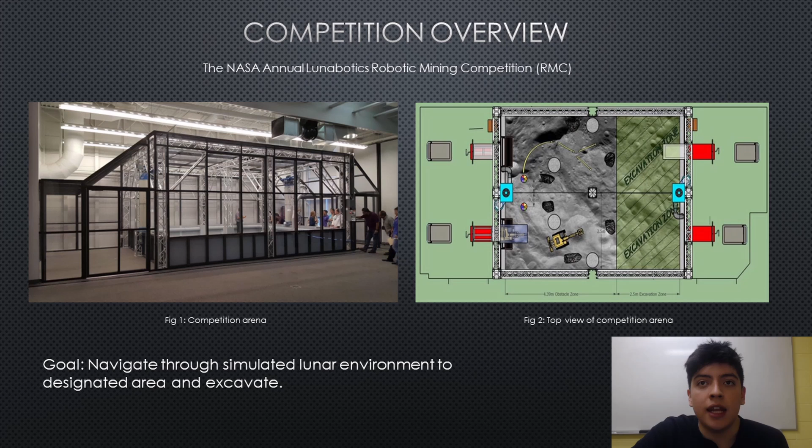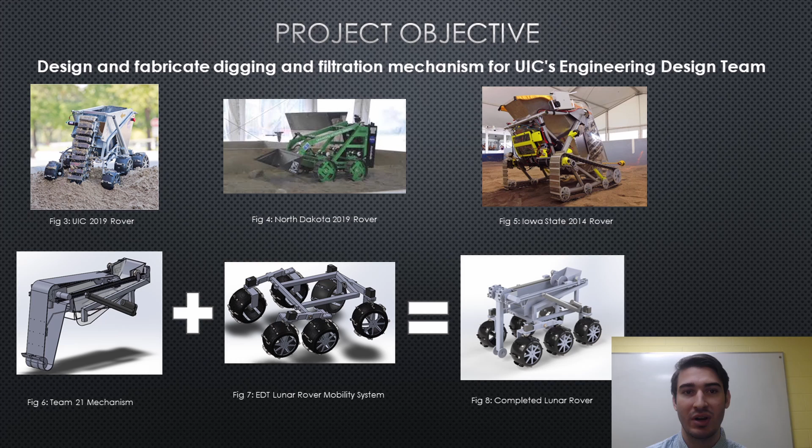The goal is to design and fabricate a digging and filtration mechanism and attach it to UIC's engineering design team's mobility system. The team will earn 1,000 points if the rover passes safety and communications inspections, and the rover fits within the starting dimensions shown in the figure. The team will also earn 10 points per kilogram of gravel mined in excess of 1 kilogram.

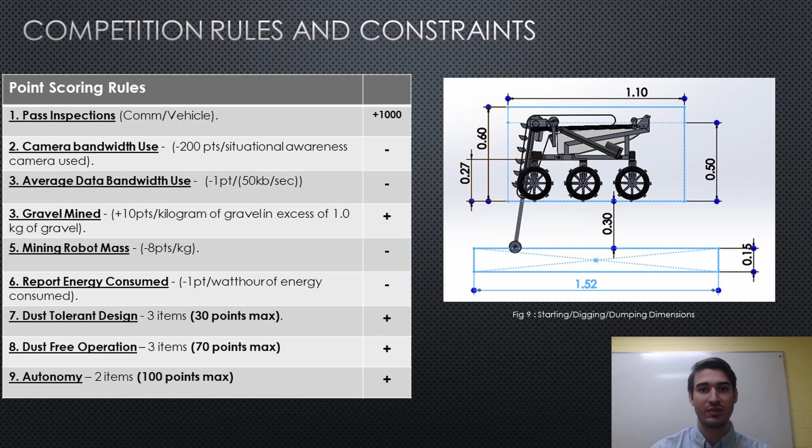To do this, our mechanism must dig through 30 centimeters of regolith to reach the gravel layer, and must dump it into a collection bin at a height of 50 centimeters. The team loses 8 points per kilogram of mass for the rover. Dust-tolerant design and dust-free operation will earn points according to the judge's discretion. Automation of the digging and dumping process earns 50 points each. The team will also lose points for camera and data bandwidth used along with energy consumed.

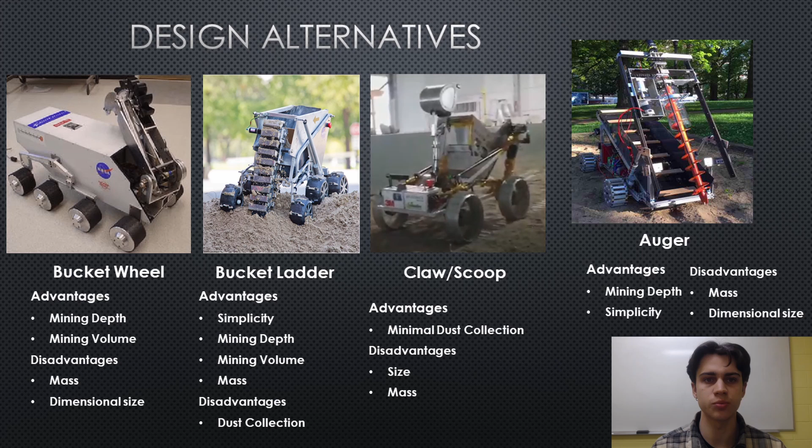After reviewing videos of various digging mechanisms from the previous NASA competitions and studying written works on the topic, the team narrowed down the design for the digging mechanism to be based off of one of the 4 following systems. These 4 systems consisted of an auger, a bucket ladder, a bucket wheel, and a scooping arm. The main reasons why these 4 stood out from other digging mechanisms were that all 4 have had some form of proven success in this competition previously, while also appearing to be the most feasible to manufacture with the tools available.

The team used a design matrix to assist in selecting the digging mechanism type that would be the most optimal for this specific application. 7 key aspects were considered for each design type, and scores were given at the discretion of the team members. As is displayed in Table 1, the selection criteria related to the mechanism's overall mass and mining capability were ranked at the highest weight of importance. This is due to them both being directly related to how Chicago EDT can earn competition points.

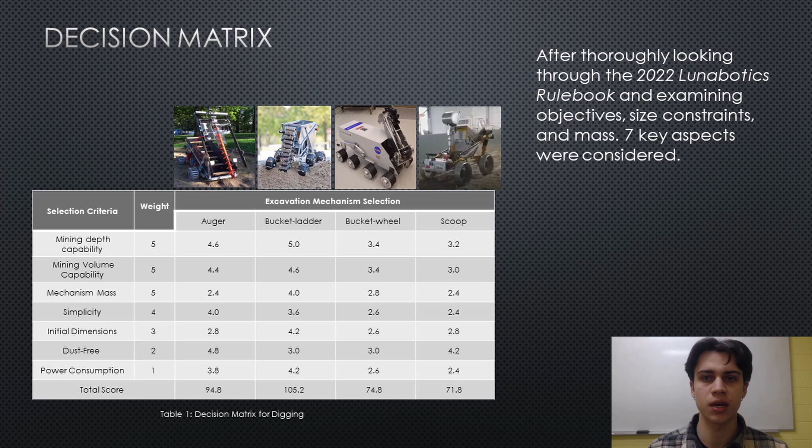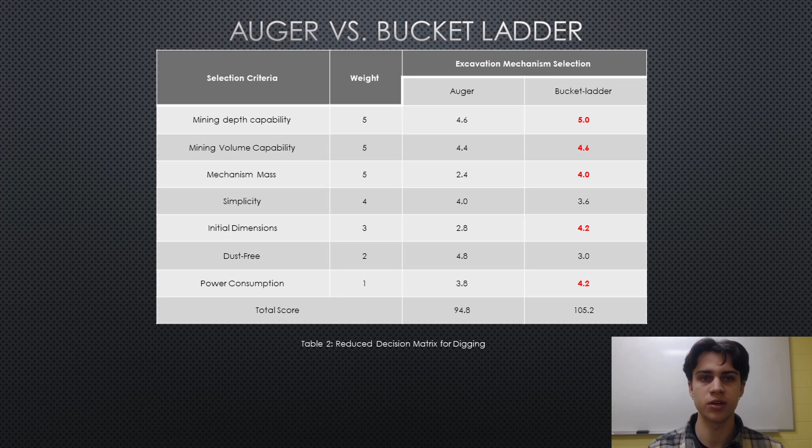Other criteria such as simplicity and initial dimensioning were also taken into consideration in order to make the design and fabrication more feasible. Out of the 4 designs, the 2 most prominent options were the auger system and the bucket ladder system, with the bucket ladder scoring the highest overall. Some key factors that made the bucket ladder stand out were that it scored the highest on all 3 major design criteria, as well as scoring the highest in the initial dimensioning section. Additionally, the team's research uncovered that in previous years, bucket ladder systems have proven to be the most effective in their competition and have outperformed their auger mechanism competitors.

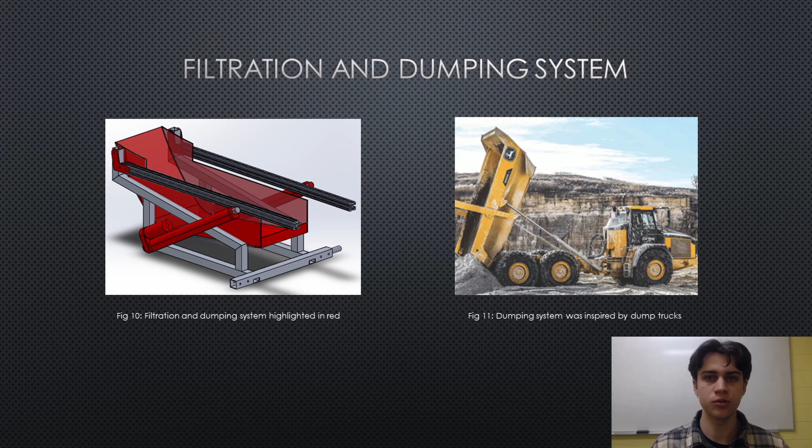The team's digging mechanism will also have an additional filtration and dumping system for unloading the collected mining sample. This simple system consists of a mesh collection bucket and 2 linear actuators that pivot on a rotational point. This allows for the team's mechanism to do all 3 actions of digging up a sample, filtering the sample, and then finally unloading the sample into a collection bin.

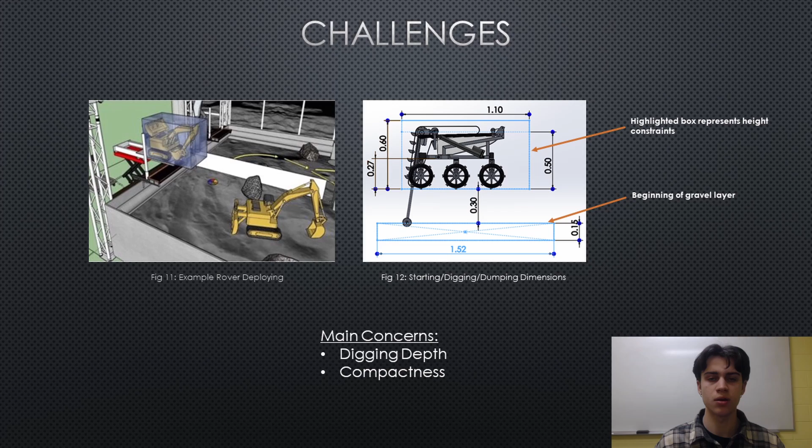The 2 biggest challenges for the team when designing the bucket ladder mechanism were the digging depth requirement and the size constraints. To overcome the digging depth issue, the team decided to design a bucket ladder that extends and retracts using a linear actuator and constant force springs. The size constraint concern was addressed by designing a bucket ladder with a bend that allows for the shape of the bucket ladder to be adjustable.

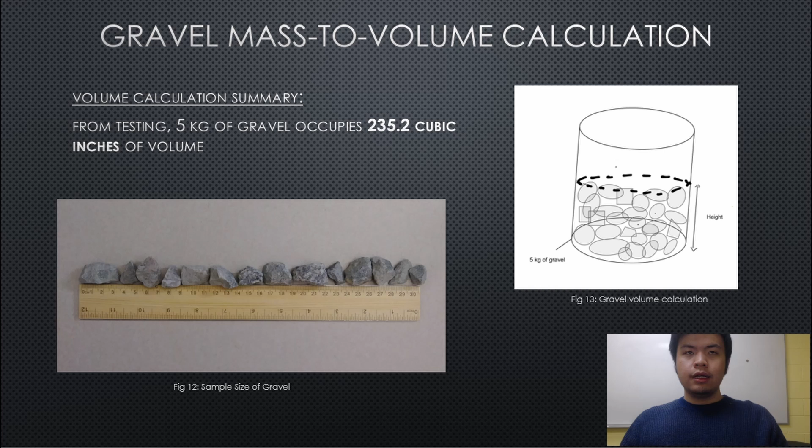For our preliminary calculation, we need a solid idea of how much space the gravel collected is going to occupy. Since the goal is to collect 5 kilograms of gravel, the following calculation is telling us that our collection bucket needs to have at least 235.2 cubic inches to accumulate that amount.

An important aspect the team focused on is getting a filtering method that is able to separate regolith. To achieve this, we are testing different metal meshes with different hole sizes, as well as 3D printed mesh. We were able to filter the gravel well with mesh sizes that range from 1/4 to 5/8 of an inch. Additionally, with an angle of elevation ranging from 9 to 15 degrees on a smooth metal surface, we found that this gives us the optimal gravel sliding.

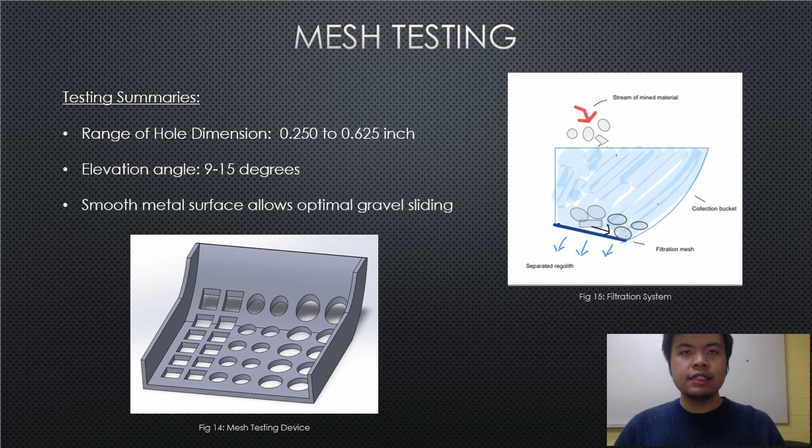Since our dumping sieve is placed at a higher position, it is important that the team devise a plan to dump the content of the collection bucket into the sieve. We decided to use 2 linear actuators mounted into the frame, such that when they extend, they will lift the collection bucket to an upright dumping position, as shown in the picture. We calculated the weights and position for these different lengths of linear actuators, and we found that a couple of 12-inch 150 pound force linear actuators are going to give us the lift that we need.

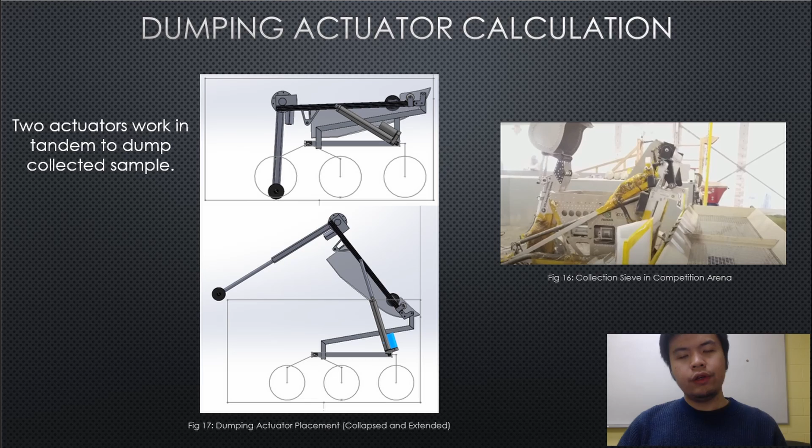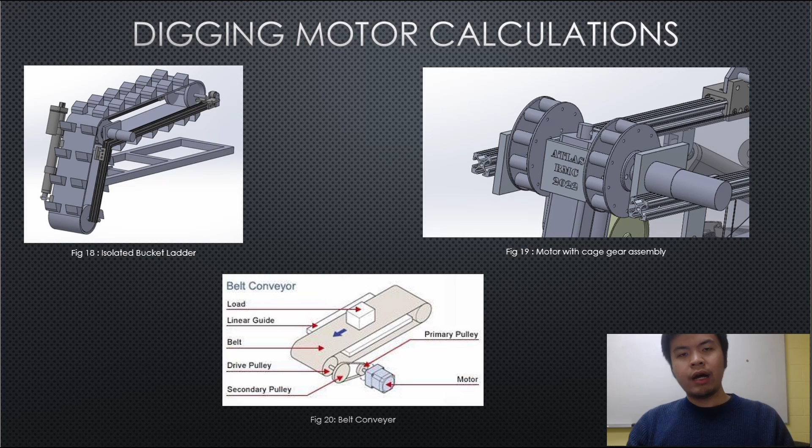Moving forward to our digging mechanism, the first thing we did is find out the amount of torque needed to operate our digging mechanism. Our team did a calculation based on the weight of the component of the digging bucket, the distances of the tensioner wheel, and the diameter of our gear to find the minimum amount of torque needed to operate the bucket ladder.

In the digging mechanism, the constant force springs are used to retract the belt of the bucket ladder once it is finished digging. To select the proper constant force spring, the load, such as the mass of the belt and gravel, on the spring, and the extension length required were considered.

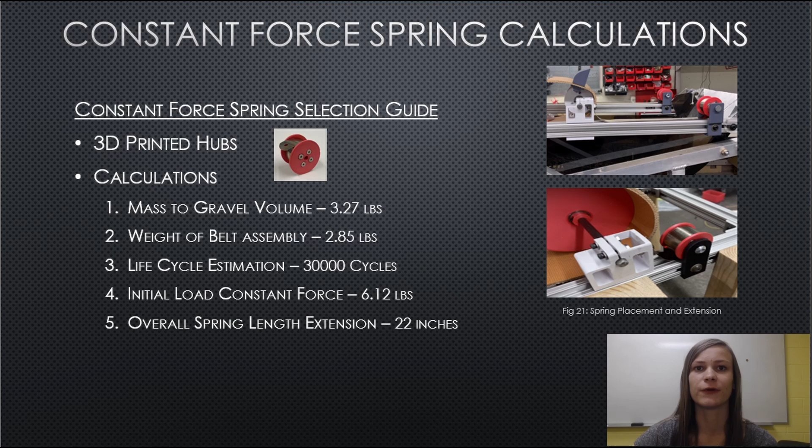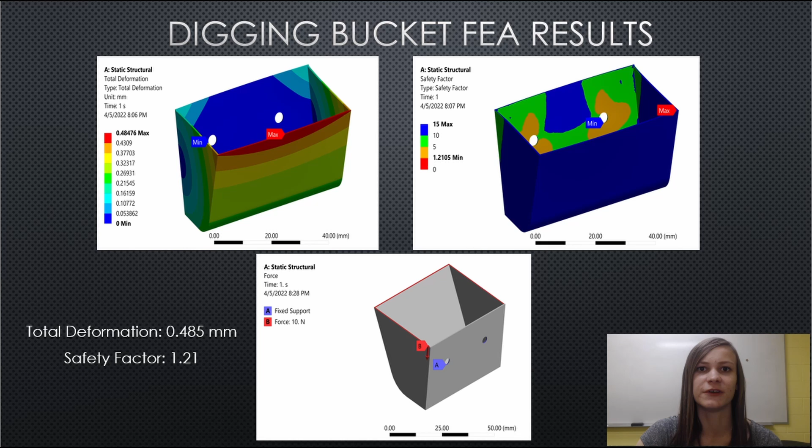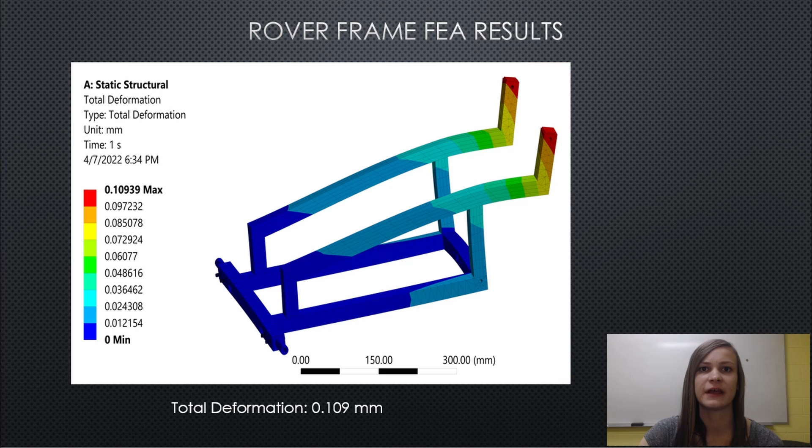A finite static structural analysis was performed on the digging buckets that will be attached to the belt of the bucket ladder. The size, shape, and thickness of the digging buckets were considered in the simulation. We plan to manufacture the buckets out of stainless steel sheet metal. An additional analysis was also done for the frame of the rover. This was performed to ensure that the rover could handle the load of the digging mechanism and gravel that will be collected during competition. After reviewing the calculations and testing, parts were specified and chosen.

First is a brushed DC motor with a stall torque of 2,420 millinewton meters. Next is the linear actuators used for the digging extension, which have a max extension of 14 inches with a force of 450 pounds. The linear actuators used for the dumping are capable of extending 12 inches with a max force of 150 pounds. The buckets that are attached to the belt are made of 301 stainless steel with a thickness of 0.015 inches. Finally, the mesh used to filter the gravel has a diamond pattern opening of 0.04 inches by 0.091 inches.

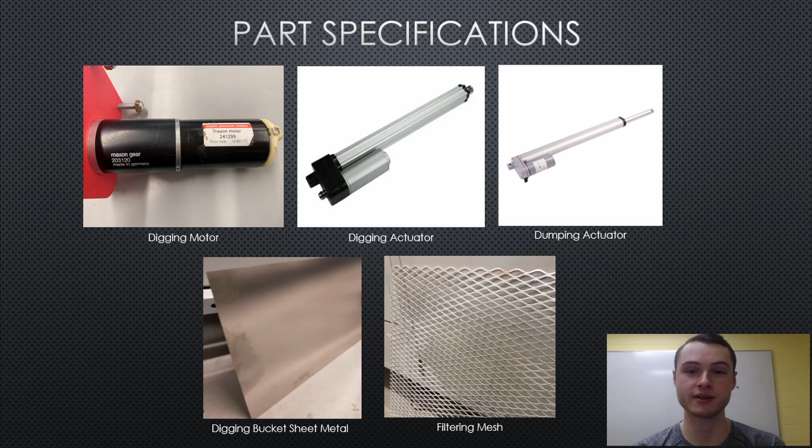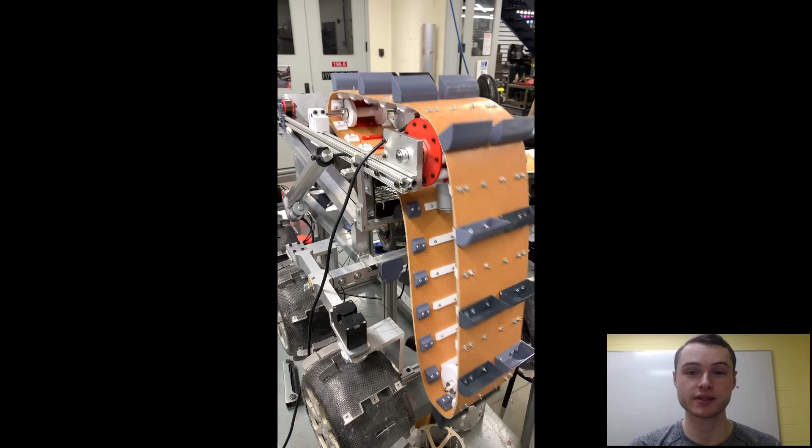As mentioned previously, a traditional bucket ladder design did not meet the team's key requirements, therefore significant modifications were made to the design. The operation goes as follows. The digging motor is activated. The front digging actuator extends the full 14 inches. Top layer regolith and gravel are collected and then transferred to the collection bin. The regolith and gravel are separated via the mesh. And finally, the dumping actuators extend the full 12 inches until the collection bin is empty.